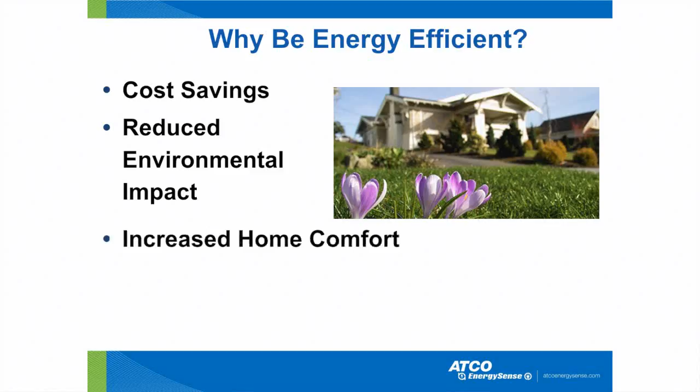A more energy efficient home is also a more comfortable home with less drafts and higher humidity levels. Many changes can also improve the property value of your home.

So set back the temperature of your thermostat before bed and while you're away from home. This works best with a programmable thermostat. If you have a consistent schedule, you can basically set it and forget it. Temperature setback can result in some significant energy savings where it is done consistently.

As a rule of thumb, for every degree that you set back the temperature over an 8-hour period, you can save 2% on the heating portion of your natural gas consumption over an entire year. So the question is, how much do you set it back?

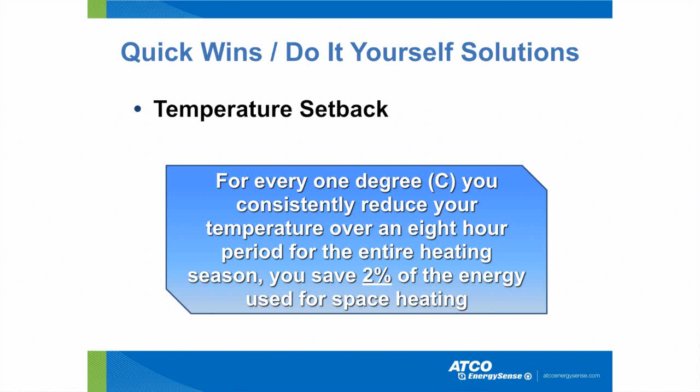Well, this depends a lot on your personal preferences as well as the condition and age of your home. Older houses that tend to be drafty and less well insulated will take longer to return back up to temperature. And so some experimenting may be required to decide what you're comfortable with.

Check and maintain the weather stripping on doors and windows annually to provide a tight seal. Also, adjust the catch plates on doors so that the doors close tightly around the weather stripping. Seal up air leakage points in the house with the appropriate caulking or spray foam. Air leakage can contribute significantly to energy consumption in the home, not to mention feeling chilled in the house.

Some areas to consider are around the window and door frames, light fixtures, air intakes and exhausts.

Regular maintenance and cleaning of your appliances will also reduce energy consumption and extend the life of your appliances. Check your owner's manual for recommended maintenance schedules, and in particular, check your furnace, your hot water heater, your dryer, and your fridge and freezer. Replace furnace filters as recommended, usually monthly or quarterly, according to the manufacturer, and that's to maintain the airflow and to reduce energy consumption from the furnace fan.

To increase the life of your hot water tank, regularly draining off a few gallons off the bottom of the tank will help to remove some of the sediment that's collected there. Clean the lint trap off the dryer after each use, and check the dryer vent regularly. Remove frost buildup in freezers and vacuum off the coils of fridges and freezers to help dissipate heat off of the coils.

Phantom power, or standby power, is the electrical power that's consumed by devices when they've been turned off, but they continue to draw energy to run clocks and to run the internal programs or heaters. Some devices like televisions and computers can be fully powered off using power bars. But don't try this with your cable receiver, as it'll lose all of its programming. Phantom power can add up to 50 kilowatt hours to your monthly consumption.

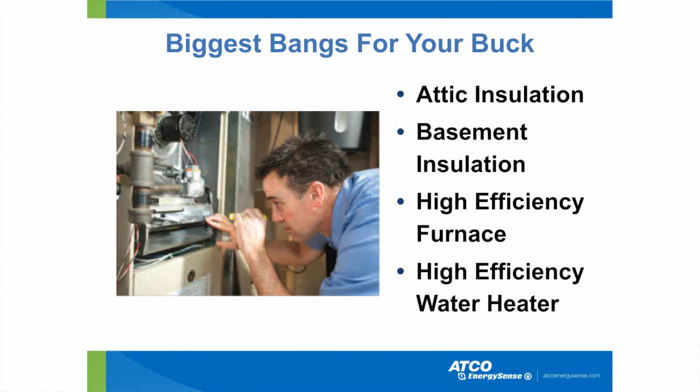Something to be aware of is the electric hot water tanks. These are being found particularly in new homes. Electric water heaters will cost at least 3 times more to operate than a natural gas unit and will have slower recovery times as well. Over the typical life of the water heater, this can mean an additional $4,000 in increased operating costs.

As you can imagine, upgrading the exterior wall insulation is an expensive proposition. It should generally not be considered as an energy-saving option alone, but consider the effect on the property value and your home comfort level as well. Look for low maintenance and long-term sustainability in your exterior finishes. Upgrading the exterior wall insulation can be accomplished in a number of different ways, but the most common is to add 1 inch to 2 inches of foam board to the exterior underneath the new finish. So there's a variety of foam boards that are available on the market with different R values, structural properties, and moisture handling capabilities.

Windows and door replacement is another option for energy efficiency that you can consider. However, in most homes you will not see the incredible energy savings that are touted in some of the commercials that you may see. In the average house, 10 to 15% of the wall area is made up of windows. And the change in the insulation values between the old windows and the new is really not that significant. As with exterior wall insulation, look at the effect on property value and improved comfort level.

When replacing windows, consider triple glazed with 2 low E coatings. While heavier and more expensive, they offer higher energy savings, better UV blocking, and better sound control qualities. Replacing windows also offers opportunities to install different size windows, new window locations, and opening windows where there were once just sealed units.

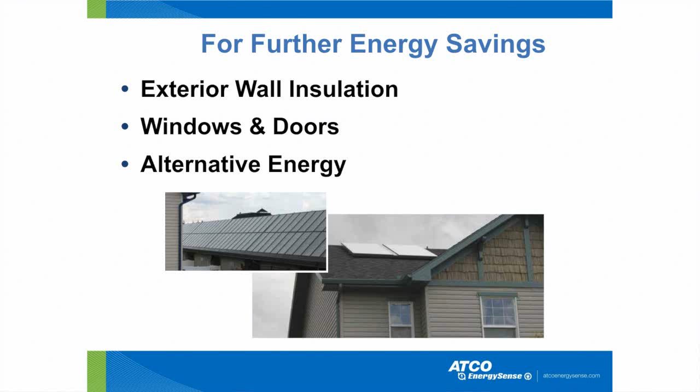A rule of thumb in energy management circles is to reduce energy consumption first through a better building envelope, and then install more energy efficient, properly sized mechanical equipment. Once this has been accomplished, or at least implemented, alternative or renewable energy sources can be considered. It is more cost-effective to reduce energy consumption than to purchase energy generation. When a major retrofit is being proposed, alternative energy can be factored into the equation.

When it comes to replacing appliances, look at the EnerGuide rating to see where it fits amongst its peers, and for the Energy Star logo that ensures that it is amongst the most energy efficient available. Natural Resources Canada actually offers a website with a list of appliances as well as their energy ratings. So it's important to consider the second price tag, that is the energy cost, when you're purchasing appliances.

Some appliances are worth replacing right from the beginning with Energy Star rated appliances on energy savings alone. Fridges and freezers in particular can pay for themselves in energy savings where the existing ones are older than 20 years old. Others that come close are dishwashers and clothes washers. These can reduce water and energy consumption considerably when you choose the most energy efficient models. When appliances start to break down, compare the cost of repairs to the purchase price of a new Energy Star model and its operating costs.

If you have a second fridge, how old is it and how much do you use it? If you don't use it much, unplug it while you're not using it. If it's old but you do use it most of the time or all of the time, consider replacing it with an Energy Star model.

When upgrading your appliances, consider also the energy source. Appliances that operate on natural gas instead of electricity are significantly cheaper to operate than electric appliances. This includes ranges and dryers as well as the water heaters that I've already discussed. Natural gas is also a greener energy choice and produces significantly fewer emissions than Alberta's fossil fuel-based electricity system. If you're in the midst of planning and doing your renovations, this is the perfect time to extend natural gas lines throughout your house while it's open.

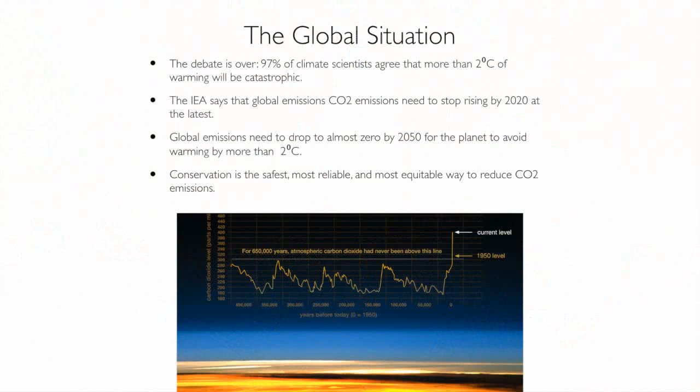So how many people here are here because they're concerned about climate change? Okay, so pretty much everybody. So I'm not going to talk about that, but I am going to talk about one thing here that I want you to think about. So every time somebody builds a building or does a retrofit, they're actually locking in the emissions from that building for the next 40 or 50 years. So the buildings that we're going to be living with, say in 2050, are being built today. And if they're not being built to the standard we want in 2050, we're locking in the emissions from that building.

So when you look, for example, at all the buildings that are going up in the Arena District, these are mediocre, they're better than they used to be, but they're not hugely energy efficient buildings. They're nowhere near what they could be. So we're saddled with the emissions from those buildings from now until they have major upgrades. And at that point, we'll have the option to do energy upgrades rolled into that. But if you're in a 1930s, 1940s, 1950s house, you probably need new windows and new siding anyway. That's the perfect time to upgrade that building.

But if you've got a 2-year-old house, you're not going to do anything to it for two reasons. One is you don't want to destroy that brand new siding and those brand new windows, even though they're sort of better than old windows, but they're not that great. But also the potential energy savings to go from today's code-built house to where it should be is considerably smaller. So the cost to get that saving is much higher. So I say this by way of encouragement: if you're doing something, swing for the fences, go the whole way, don't lock us into ongoing emissions.

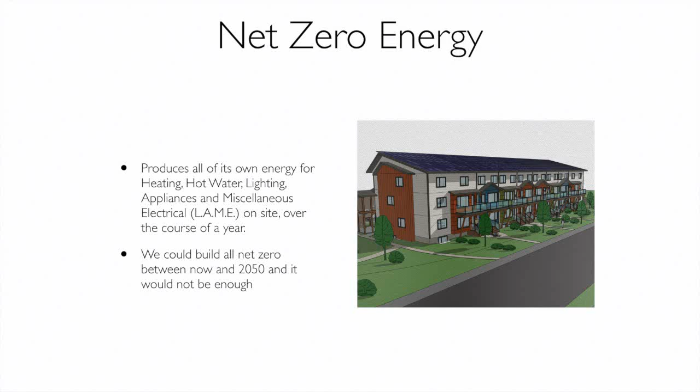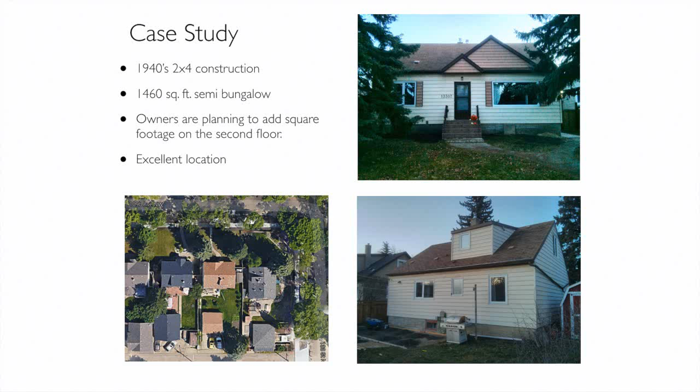So I'm going to use this little house here in North Glenora as a study point for what I'm going to talk about in the rest of the few minutes we've got here. So this is a family of 4. They're living in this little house. They want to upgrade it, and they're sort of wondering how to go about it. They actually want to enlarge the 2 upstairs bedrooms and maybe add a 3rd one in the same process. So they've kindly allowed me to, together we did an energy model on that as a starting point. And we'll take you through possible upgrades to this house. Now, if they were interested in net zero energy, we could do this.

So that's the size of solar array it would take to get a little house all the way to net zero energy. So it's fairly easy to see that ain't going to fly. So instead, we started by doing an energy evaluation on this house, because we need to know where it's going before we can sensibly address the best way to do anything about it.

So this is like a late 40s semi bungalow, and this is fairly typical. It's got the energy loss on this building, and this is the way this building was built. In fact, on our case study house, the windows have already been replaced with dual glazed windows, and I'll talk about that a bit more in a second here. So that's kind of our starting point. It's a real house. This is a real HOT 2000 model.

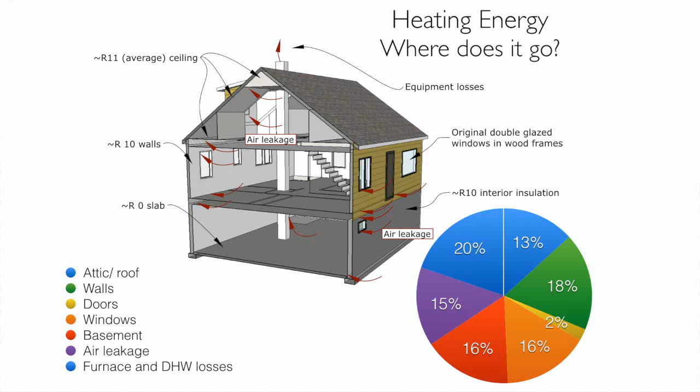And now I want to talk a little bit about energy units, just because I'm going to be talking about kilowatt hours for everything, for gas and electricity. Any energy unit can be converted to any other energy unit. And when you're going for net zero energy, and even when you're doing a deep energy retrofit, we're worried about both electricity use and gas use. So to make it easy, I've just converted everything.

I also want to mention the difference between energy that you use in your house and primary energy. The primary energy is the energy that goes into getting that energy to your house. And this reinforces to some degree what Jim's saying: when you use electricity, it takes 3.2 units of raw coal to get 1 unit of electricity to use in your house. With natural gas, it's more like 1.6. So generally, for heat, you're better off to stay using natural gas until you get down into net zero energy territory.

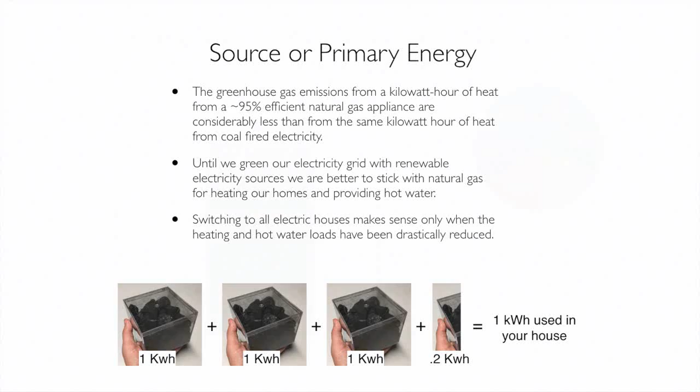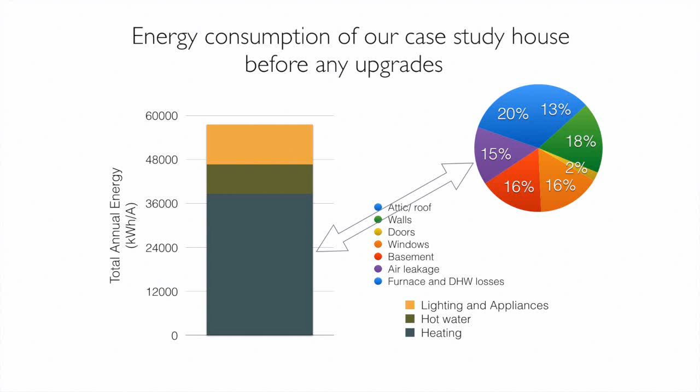So just to show this graphically, this is our case study house before any energy upgrades. Heating, you can see, is by far the biggest chunk. Hot water is the smallest, and lighting and appliances is pretty big. And this is based on average electrical use for a typical Canadian house.

So I mentioned energy modeling, energy audits. It's really critical to know where it's going before you start trying to do anything about it. And I've seen a few instances where people haven't done this and really regretted it afterwards. I was in Winnipeg about a year ago, and after a talk, I had a farming couple come up to me who built a new house outside of Winnipeg, and they really wanted to do a good job on it. They put lots of insulation in, but they did double glazed windows, and they hadn't paid too much attention to air tightness. They would have gotten way more bang for their buck if they'd started out looking at that.

The energy audit, the energy modeling, actually acts as a checklist, so that you don't overlook anything, and you get the most bang for your buck on everything. So you're not putting too much insulation in one area and not in another. So I would say before you do anything major, before you spend any money, be sure to get an energy audit done. It will save you the cost of that audit for sure.

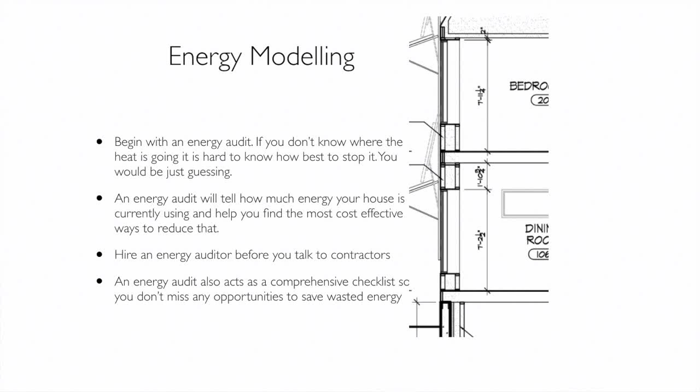And it's also the basis of all the incentive programs we've ever had too. You basically had to have an energy audit done before and after. So take advantage of that. If you can't wait to see what our new governments do, do it anyway. It's really the sane way to do this, and just the way it works.

When we were building the Riverdale house, we knew we needed high levels of insulation, but we didn't know how far to go in various areas. So we looked at our energy audit and said, okay, we're losing this much through the basement floor. What happens if we add another R10 to that? How much is that going to cost? And what's the cost for every kilowatt hour that we're going to save year in, year out? And how does that compare with the cost of the last measure on various other parts of the building envelope?

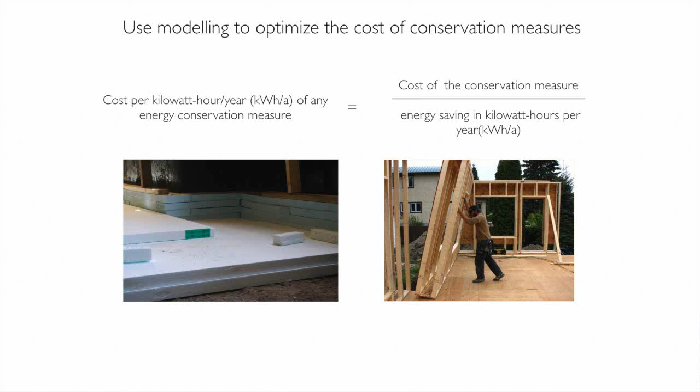And when those are all about the same, then you know you've got an optimum. And so it's just a really good thing to do. So I won't spend too much time on this stuff because Jim really talked about it very well. But the first step, the least intrusion, you're not tearing out any walls. You just call the guy and they do it.

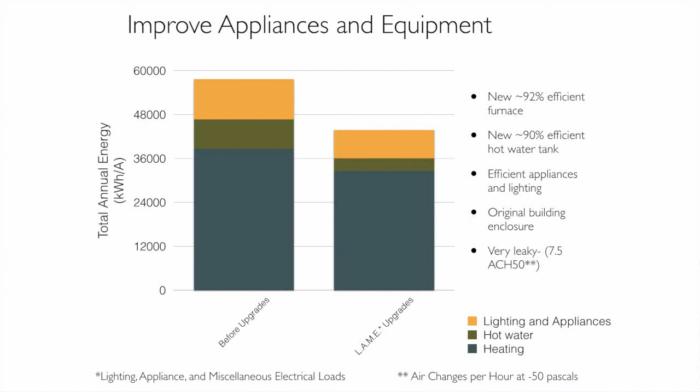Obviously, the first thing to do, I think, is to improve lighting and appliances. And that means high efficiency furnaces, hot water tanks, efficient lighting. And so this is our test house with those things done, and you can see we've knocked a pretty nice chunk off of there in the heating and hot water energy, and some in the lighting and appliance energy as well. And it's by doing the things that Jim mentioned. I won't dwell on these.

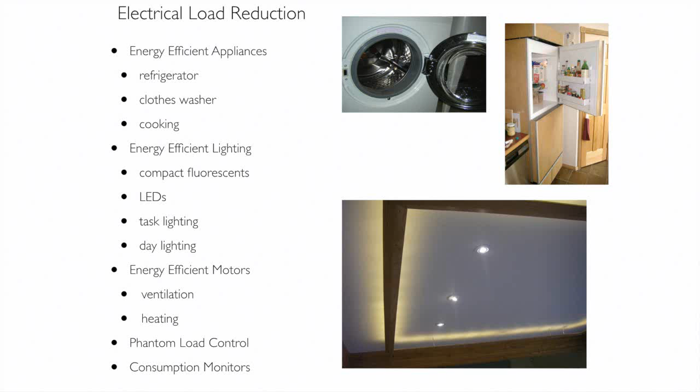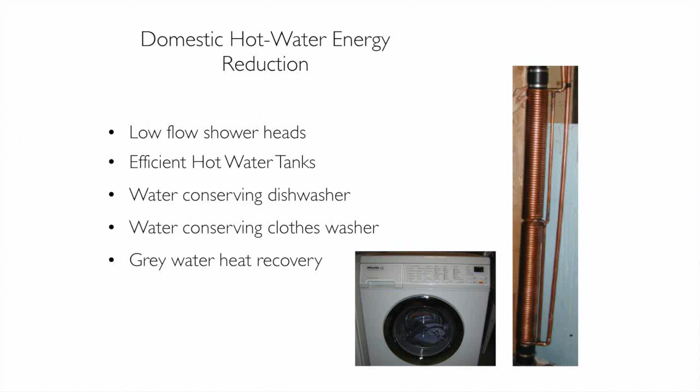Energy efficient appliances will often save you several ways. They'll cut down on the electricity use, plus they'll cut down on the hot water use, which saves hot water energy. The device on the right hand side there is a drain water heat recovery that won't work with the plumbing in lots of houses, but you can actually save 30 to 40% of the energy to heat shower and bath water with one of these things. They're very cool, which I won't go into in too much detail.

So then the next kind of relatively easy thing would be to change the windows. And Jim mentioned that you don't get a huge bump out of that. It's true. So this would be what would happen if we took our test house and just changed the windows to dual glazed low E argon windows. They'll probably improve the air leakage of the house a little bit, but it's not a huge benefit.

And in fact, this house that we're using as our test house has already had this done by the previous seller, and he did it to make the house easier to sell. Well, our folks would have been way better off if he had just given them the money and let them put it into good windows and upgrading the house. But he essentially paid for that when he bought the house, and it's kind of a lost opportunity.

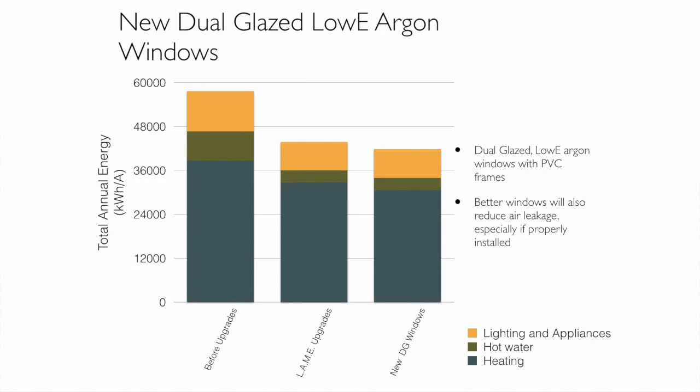Also, we looked at a house where people wanted to do a deep energy retrofit a few years ago, and they had already done a few upgrades and spent a bunch of money, and that ended up being the difference between them being able to afford the deep energy retrofit and not. So really just underlining the fact that you should find out where you are before you start.

So in upgrading windows, there are a number of considerations. Obviously, you want the highest R-value glass you can get. If the windows face south, it's good to have a high solar heat gain coefficient on that glass, so that any passive solar that you can get will be available. But the energy model will also tell you if you're in danger of overheating from that. Sometimes it's fairly complicated, but the energy model can help you with that. You want low conductivity frames. Some windows have steel in them. They look great, they're vinyl, but you want to check that out.

Small profiles. The good part of a window is the glass. It's usually got a way higher R-value than the frame if it's a really good window. And so the less frame, the more glass, the better, the more light you're going to get, the more solar gain, less heat loss, and good spacer bars in the glass. And also really good air tightness. As you get everything else solved, windows are one of the big remaining heat loss leaks. And so the really good windows have triple weather stripping.

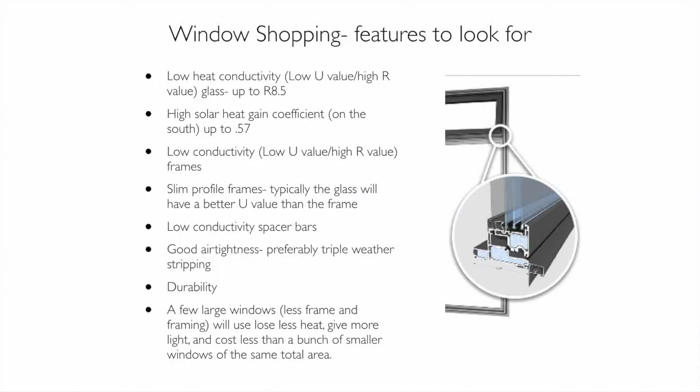And ideally, the fewer divisions in the windows, the better. A small number of bigger windows with fewer divisions will perform better than windows with a bunch of little bars and frames chopping them up, for the same reason I just said.

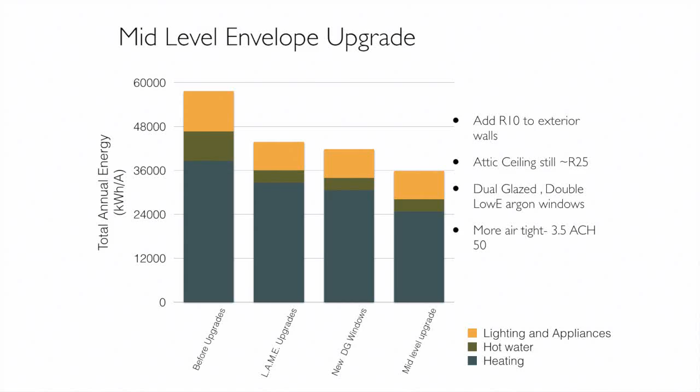So, you know, we're obviously not going to just change the windows. We'll look at a mid-level envelope upgrade here. So it's getting better. This would be adding, say, R10 foam to the outside, upgrading the attic. That's relatively easy to do. Still got the dual glaze windows. Now the house is a little more airtight, or can be gotten to be more airtight in this process. So, you know, the steps involved in that, adding the exterior insulation: never do siding without windows or windows without siding.

They go together, they interface, and there's a whole bunch of extra work and cost. If you put the windows in and then come back and do the siding later, there's a good chance you're going to end up with a bunch of extra work. If you do the siding today and don't do the windows, same kind of thing.

So you have to be a little bit careful in adding insulation, say a foam insulation. You don't want to put a second vapor barrier outside of a leaky interior vapor barrier; that can trap moisture. So that's worth checking, and you need good advice.

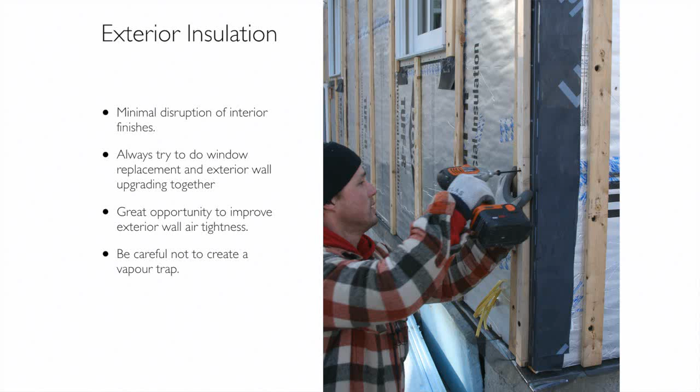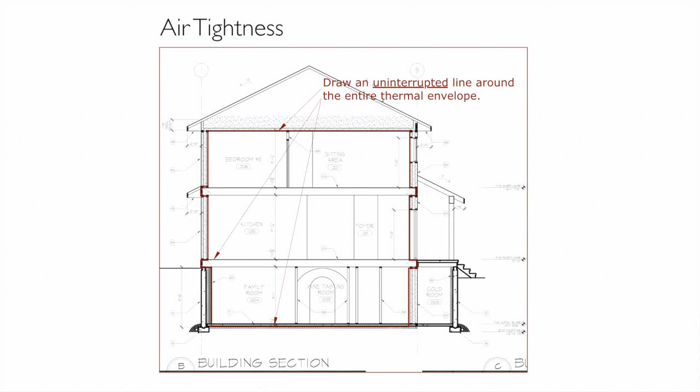But in general, you do have the opportunity in that situation to improve the wall portion of airtightness. We like to take a cross section of the house and then draw a red line all the way around the building so that we can, either now or strategically as we go through these renovations, figure out how to seal off the entire house.

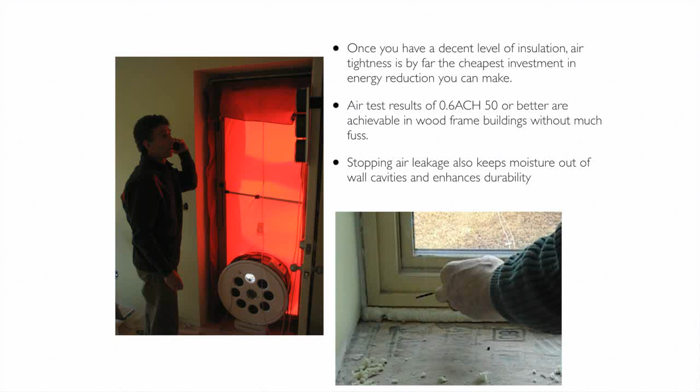Airtightness, once you get the insulation levels reasonable, really becomes the remaining biggest chunk of heat loss. It's also the most economical thing to do, and to replace siding without dealing with airtightness, or windows without dealing with airtightness, is again another real waste. And your energy model will tell you that.

With older attics, you can just blow more insulation in there, but typically they're very leaky. There are all kinds of little places where partitions join the ceiling, where electrical lines and lights come through. None of those are sealed at all, and they're not only letting air out, but also letting a lot of fairly moist air into the attic. So it's really important if you're adding insulation to keep that ventilation intact, so that any moisture that gets through there can diffuse out.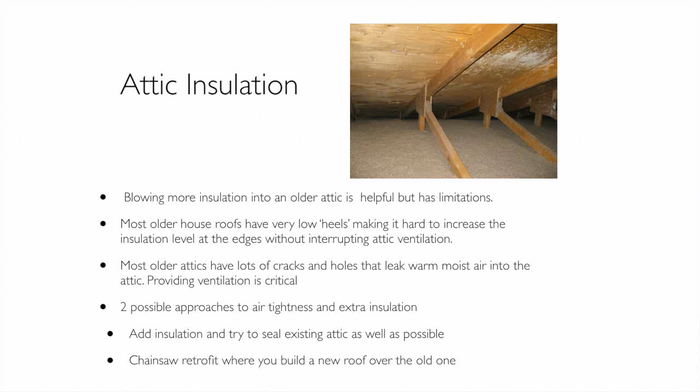So there's a couple of different choices. Adding it under the existing roof space: if it's a flat ceiling situation, you can usually add a fair bit of insulation in the middle, but you can't add much at the edges, or you'll block off that ventilation. The alternative is what we call a chainsaw retrofit, and I'll talk about that in the deep energy retrofit situation.

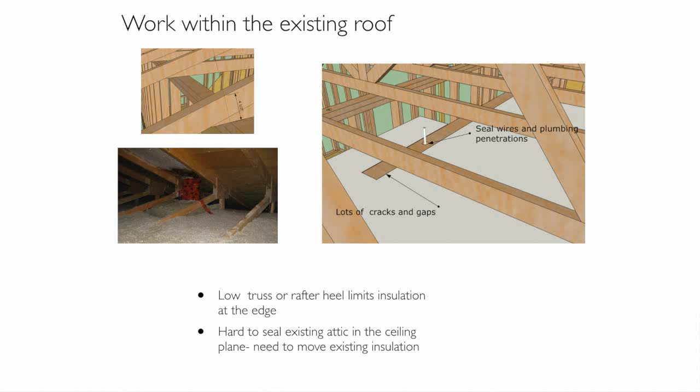And Jim alluded to this, it's really hard to go after these leaks in the attic. We've done it on houses we've upgraded, and you're crawling around with the insulation, sweeping it over to one side and trying to keep your head from being ripped open by the shingle nails, and it's messy, but it can be done. But for sure, do it before you put any insulation in there.

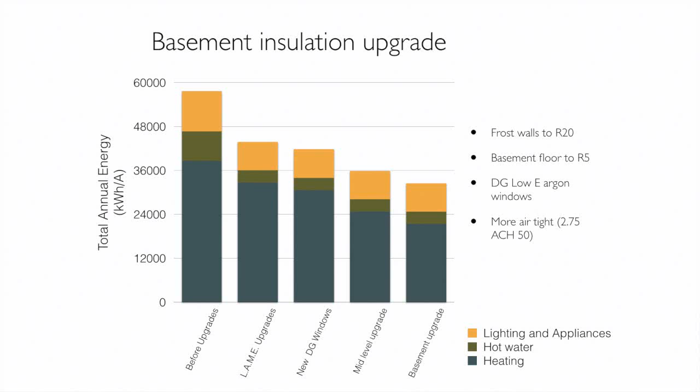So the other big heat loss is the basement, and there's a few considerations there. You can see we're now getting down there. I'm assuming with this bar here that we've still got the dual glazed windows, we've made the house a little tighter, and we're upgrading the basement. There are two ways to really do that: you can either do it on the inside or the outside.

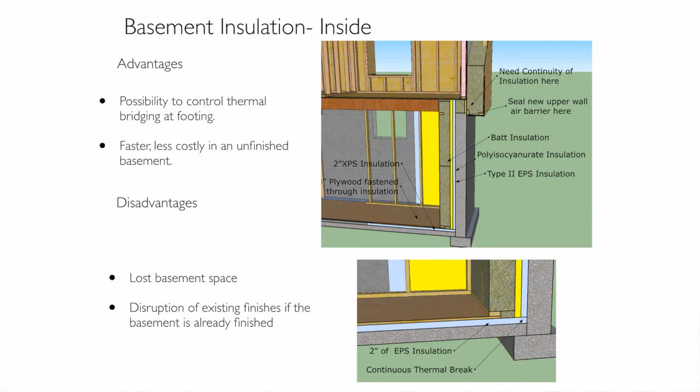On the inside, you can get a nice continuous layer of insulation, you could add some insulation to the basement floor, and you don't have to do any excavation on the outside or disruption to your landscaping, or worry about working under porches and that kind of stuff. You are going to lose some basement space, and if you've already finished your basement, it's going to be pretty hard to rip it apart, add a bunch of insulation, and redo all that stuff.

So the other option would be to insulate it on the outside, where you don't have to do anything on the inside. There are a couple of different ways to do this. You can build a treated wood wall on the outside. At the same time, you can seal any gaps in that foundation if there are any.

If you're doing a deep energy retrofit, then your new outside insulation will line up with your new outside wall insulation, which is kind of ideal. It doesn't address the heat loss at the footing that well, but it's a good option.

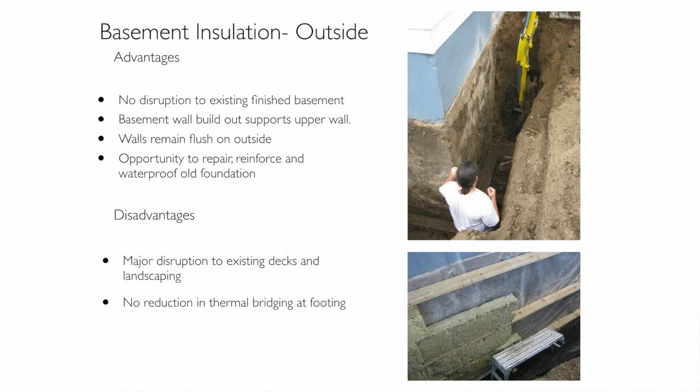And I was at a conference in the U.S. and there was a presentation on insulating the outside of basements, and I tried to find a photo of it. But you know those machines that the utilities use for finding gas lines and power lines that blast water in and then suck up the mud? Hydrovac, yeah. So these guys were using a hydrovac hose and making a 4-inch trench all the way around the building, and then pouring a special kind of spray foam in there and filling up and waterproofing the house at the same time with no digging. It was very, very cool.

And we've got all these hydrovac machines around here. That's technology that was invented here in Alberta. And they did an analysis of it, and of the three things I've talked about here, it was actually the cheapest option. So, a little business for some entrepreneur here.

We talk about going for broke, hopefully not in the financial sense. The deep energy retrofit, I think, is the way to go. So we're looking at potentially making the building even net zero energy ready. So this is a building that would be suitable for 2050. So we're looking at walls in the R40 range, the attic up in the R80, frost walls at least R20, preferably higher. Some insulation on the basement floor. It actually doesn't take much to make a big difference on the basement floor.

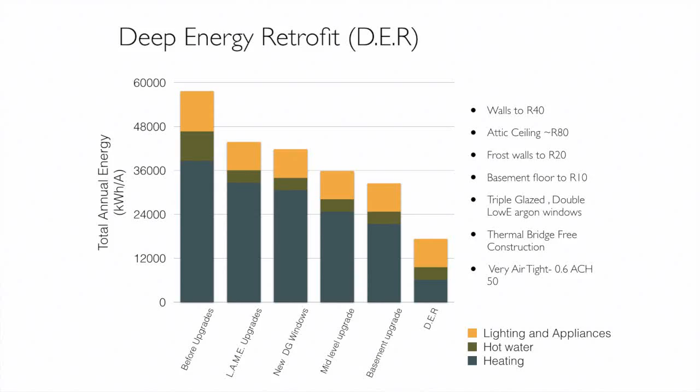Triple glazed, two low-E coats and argon-filled windows, thermal bridge-free construction, and very airtight, like passive house airtight. So there are a couple of these going on here in Edmonton right now that I've been helping with. These are friends and colleagues who are doing it on their own houses. And in fact, they're going to do a presentation on these houses much more in depth for the Solar Energy Society at the end of March. If you Google SESA, S-E-S-A, they've got a great lecture series that has all kinds of interesting energy upgrade ideas, and they've got a good archive there too of past presentations.

But the first one is over in Ritchie. So it's a 1940s wartime semi-bungalow, and they've added seven inches of wall on the outside of the house, about 14 inches on the top. They've wrapped the whole thing in a new air/vapor barrier, triple glazed windows, new siding and shingles. I mean, this house really needed this work. The foundation was good, but they've also completely redone the interior. But they could have done the deep energy retrofit really without doing much at all on the inside.

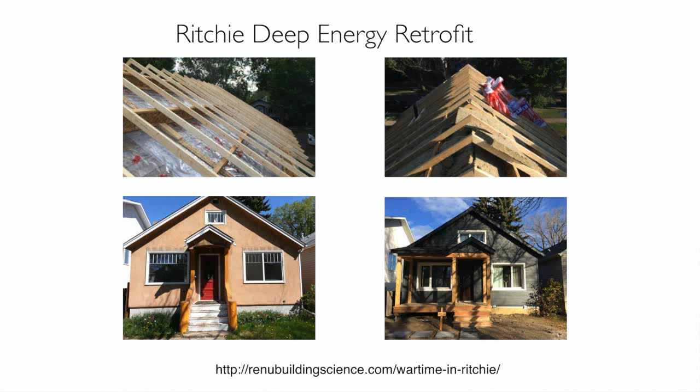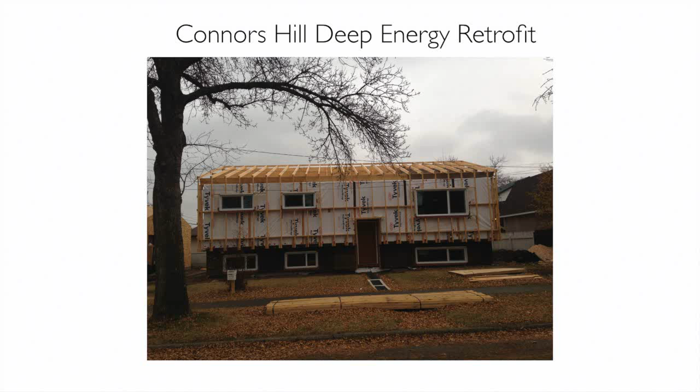And this one here has a south-facing roof. It will be net zero energy for sure. It'll probably be the first real net zero energy retrofit. Well, other than the one we did, but that was a little different. The house had a fire, and we cleared it down to the main floor. The owner of this will talk about it at the same session in the spring.

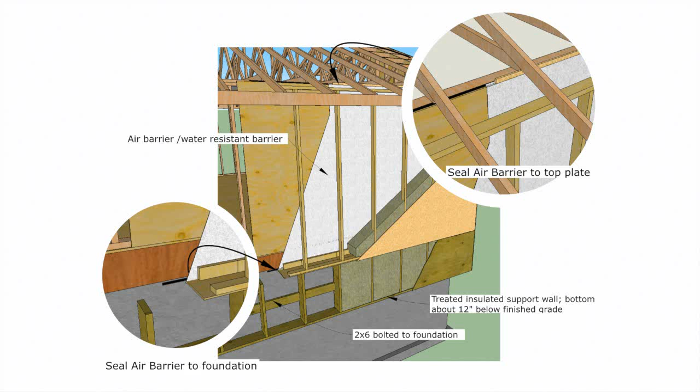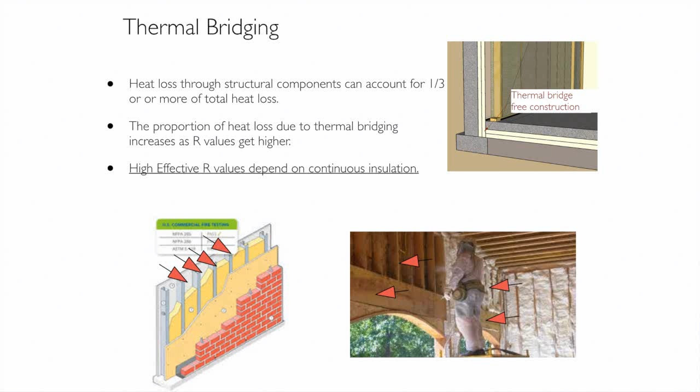So in the process here, there are just a couple of little details. Getting that extra air tightness doesn't just happen automatically. It takes some care and attention and some thought in detailing it, but it's not rocket science. When you're doing this kind of stuff, trying to deal with thermal bridging gets to be important. We normally ignore it because the heat loss in every other respect is so big that it's not that significant. But as you start to get decent levels of insulation and air tightness, the thermal bridging starts to look like the low-hanging fruit. The framing becomes a conductor and a source of heat loss. So trying to get a continuous layer of insulation is really good.

So then, if you do get the house reasonably tight, you have to start thinking about fresh air as well, because even your average new house would have about 2.5 to 3 air changes an hour with the blower door on it, and the blower door subjects the house to about the equivalent of a 30-kilometer-an-hour wind.

So not a huge wind, like it's a stiff breeze is all. And we get that often. So in that condition, this brand new house, 2.5 to 3 times an hour, the entire volume of air in that house is out through the cracks, replaced with minus 30 air that needs to be reheated. But that air coming in is also making fresh air. So that's what's keeping you healthy.

So when you seal that up, you need to put in a fresh air machine to give you continuous fresh air. And the beauty of these things is that while they're giving you fresh air, they're also recovering the heat from the air that's going out. And it's very well worthwhile in doing that. You know, you look at bang for your buck. Just putting any old HRV in will not get you anywhere near the benefit of a really efficient one. There's a couple out there that are highly efficient, that are in the 80 to 90% range.

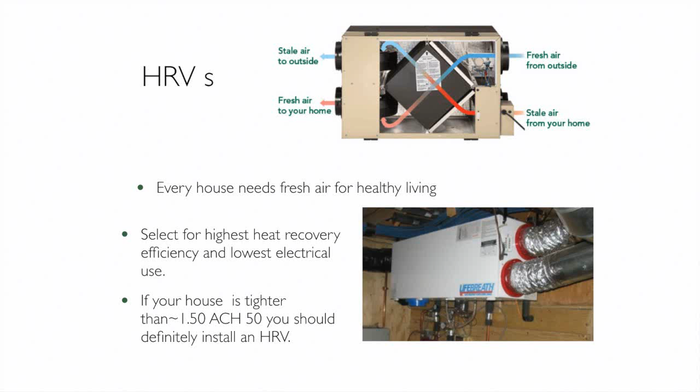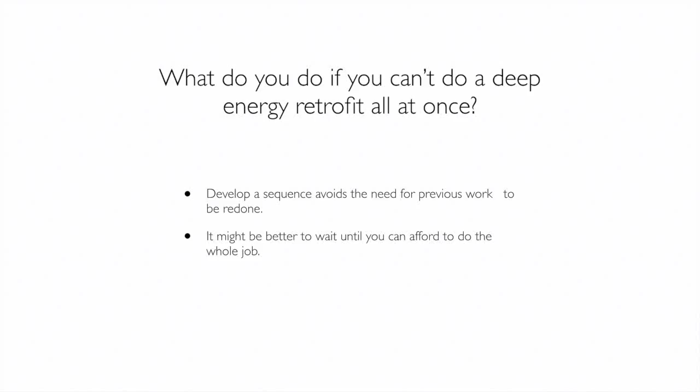So if you can't do it all at once, at least try to sequence the work so that you're not having to tear stuff you've done apart and redo parts of it at the interface. And sometimes it makes sense to wait a little longer until you can afford to do the whole job.

So I want to put in a plug here too for third-party verification. Like, this is feel-good stuff. It's easy to be self-delusional about this, and I can tell you this from looking in the mirror when I'm shaving every morning. So trust me. Knowing that you're going to have to get an EnerGuide rating before and after to prove that you did what you said you did, and if you're the homeowner, so that you know you're getting what you paid for, because we builders will tell you what we think, no problem, and try to convince you of whatever we think is the best, and it's not always what the energy audit says. But it's well worthwhile to get that third-party verification at some point.

And I think the climate panel, one of the most consistent things they heard from the energy efficiency sector was that we need mandatory energy labeling. So what that means is that you will not be able to sell your house without an energy label, so that when somebody's looking at 2 houses on the street and they can see that this one's a leaky sieve that's using a huge amount of energy, and this one over here has been fixed up and is ready for 2050, people are going to see that it's worthwhile to pay for that and not that.

So I will be surprised if in the near term, even the Canadian Home Builders Association isn't in favor of this, because it helps to distinguish brand new houses from leaky old houses. And so just another reason to do that. And we're on the verge of bringing in a new EnerGuide rating system that makes a whole lot more sense.

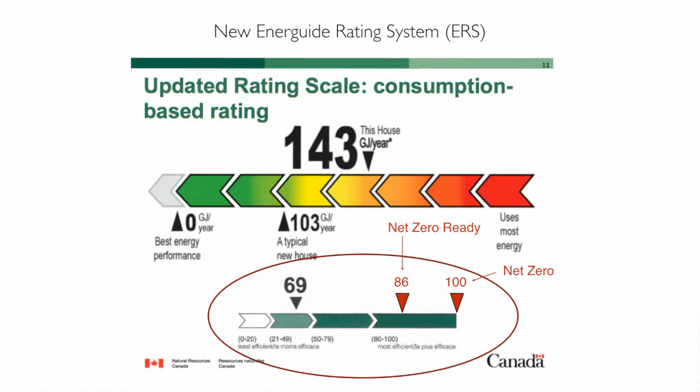Used to be that, you know, our building code around here just changed from the low 60s to somewhere around the high 70s, but it's not a straight line. Going from an EnerGuide 86, which we consider net zero ready, to 100, really is just adding renewables for the most part. So this will be a much more sensible rating, where a house that uses zero energy per year will have a zero rating. Otherwise, it will be how many gigajoules a year that house is using, and you'll really be able to sort of put yourself on a line with other houses. We're expecting this to be introduced either before the end of the year or early next year across the country.

Anyway, so the obvious question is, who can I get to do this, and what's it going to cost? And these are early days. There aren't people who are specializing in this that I know of. We upgrade houses when we do major renovations to them, but not to the deep energy retrofit level that we're looking at. There's a desperate need for training. I mean, if our government is looking for an employment program, this is a massive undertaking that we need, and there are lots of good jobs out here.

But we're hoping at this presentation in March to include costs, so we've got a pretty good idea of where the stuff's going. But I haven't gone to that. I haven't done that.